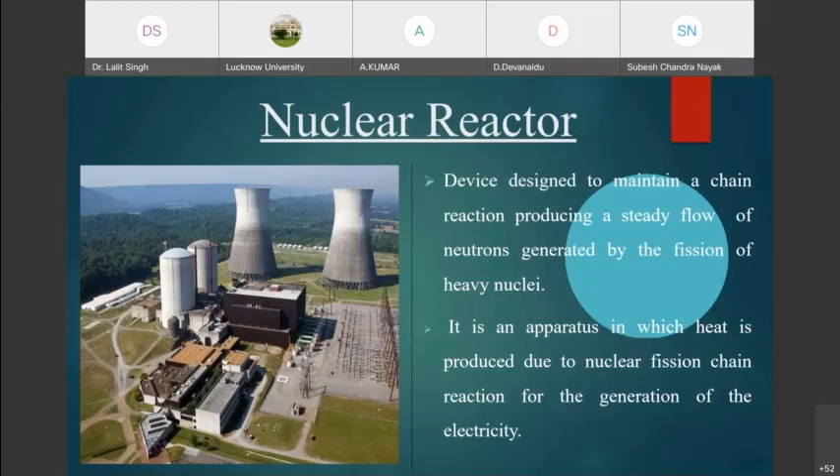Now let us see the various components of the nuclear reactor. I will be only touching upon the main components, although it consists of thousands and lakhs of components. I will not be touching on them, but from the functional point of view, as I said, the device is used to sustain the chain reaction. So for that particular activity, what are the various components that are required to achieve the overall functionality of the nuclear reactor? And then we will also see in this slide the working mechanism of the nuclear reactor.

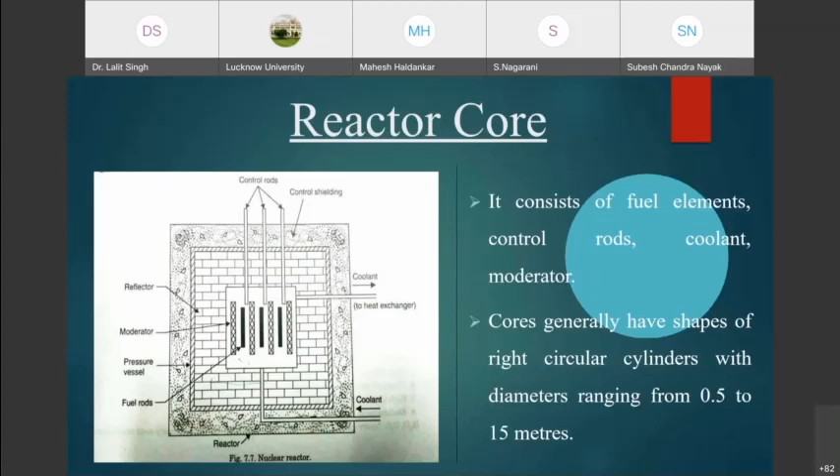So yeah, the reactor core consists of the fuel elements, the control rods, the coolant and moderator. And cores generally have the shapes of right circular cylinders with a diameter that ranges from 0.5 meters to 15 meters. And this geometry plays an important role for the efficiency of the reactor. So a lot of research scope is there to optimize the length and geometry of these cores, for which various mathematical models and a lot of physics analysis is taking place.

Coming to the reflector, as I have already discussed, whatever neutrons are trying to escape from the reactor core boundary, the reflector is imposed into the pressure vessel in the form of a coating, so that whenever any neutron tries to escape from this boundary, it can reflect back. Okay, so that we can control the population of the neutrons, because the neutrons are precious, and these are the ultimate source of energy. So it is placed around the core to reflect back some of the neutrons that leak from the core surface.

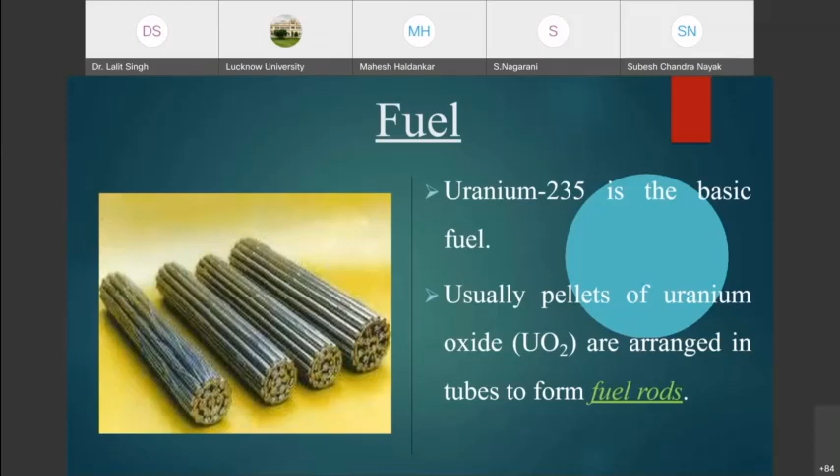Now the control rods. So we have seen the roles and responsibilities of the control rods, and this is basically to control the neutron population. Because we ultimately have to control the power: if there is a 220 megawatt nuclear reactor, which has a capacity of 220 megawatts, then definitely I should ensure that power does not rise up. Otherwise, because all the instrumentation and mechanical components are designed considering all the process parameters within the range suitable for 220 megawatts of energy.

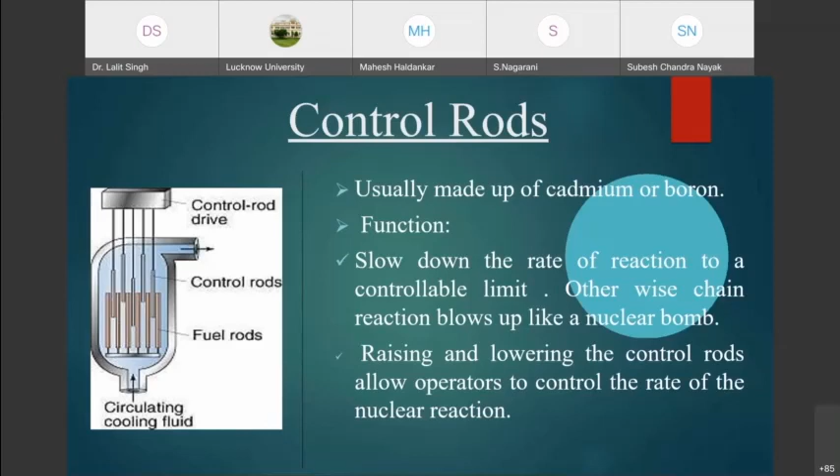Ultimately, it has to slow down the rate of the reaction to a controllable limit, otherwise the chain reaction blows up like a nuclear bomb. Raising and lowering the control rods allows operators to control the rate of a nuclear reaction. That is very important.

Now, coming to the moderator. We have touched on the moderator, and the function of the moderator is basically to slow down the neutrons, because every nuclear reaction generates 2 to 3 neutrons, which are high speed neutrons with very high energy levels. We need to thermalize, or lower down the energy levels of these neutrons.

Otherwise, they will not be able to strike the uranium nucleus, and the fission reaction will not be able to sustain. So ultimately, the role of the moderator is to maximize the probability of the neutron hitting the fuel rods.

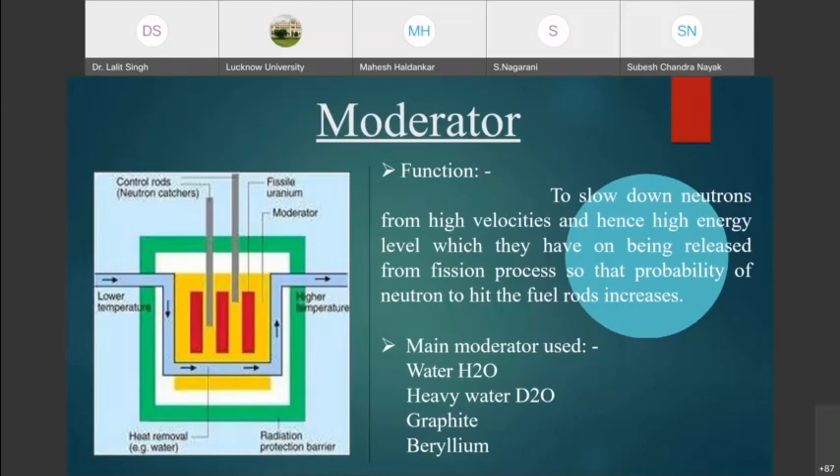But you have to wisely select this moderator, because you might have heard of the Chernobyl accident, where a graphite based moderator was used. The main reason was administrative, but the technological reason was related to the graphite. So you have to really wisely choose the moderator depending on the type of reactor that you are going to operate.

And the coolant. The coolant is basically used to remove the intense heat that is produced in the reactor, and that heat can be transferred to the water in a separate vessel. This water gets converted into steam, which is nothing but a steam generator, and that steam is used to run the turbine.

So there is a lot of research scope where you can perform the calculations and innovate new coolants that can be the best fit for a particular kind of reactor.

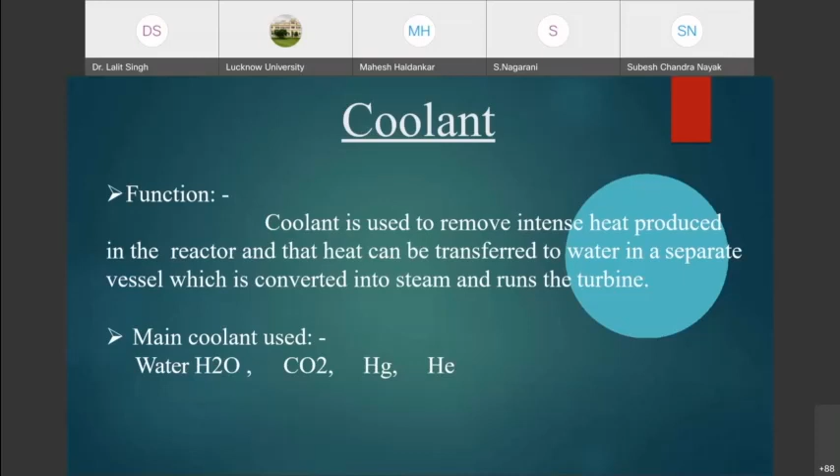Now coming to the containment. As we have seen, the containment consists mainly of three components: the reactor vessel, the pump, and the steam generator. This containment is nothing but a structure around the reactor.

Because this reactor is in a highly radioactive zone, we have to always ensure that the radioactive components do not go out of the containment zone, otherwise they can be exposed to the normal public. So it is a structure around the reactor and the associated steam generator, designed to protect it from outside intrusion and to protect those outside from the effects of radiation in case of any serious malfunction inside.

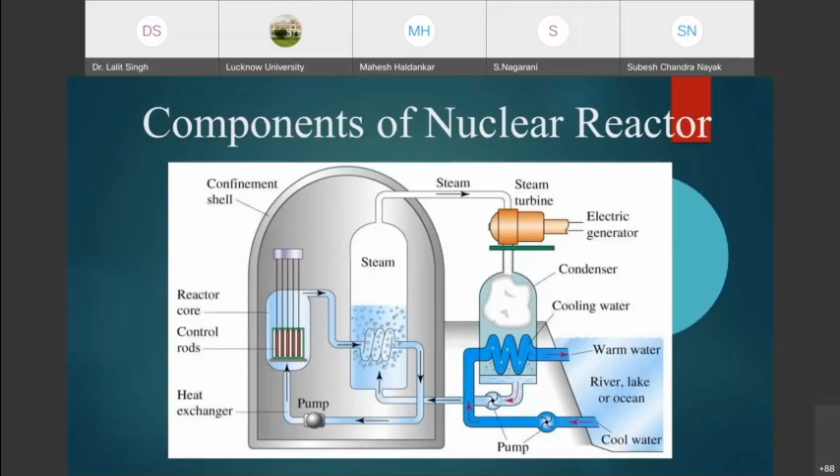So suppose, going back to the same slide, suppose there is a leak in the steam generator, for example. What will happen? The radioactive components will be out of the box and can go to the containment zone. And if there is a little leak in the confinement shell, it can go out of this confinement shell. Hence, there will be a breach of one barrier of safety.

Hence, it is very much essential to design the containment by considering all these issues, all these safety measures, and using international standards. This is the area of civil engineering. It is typically 1 meter thick concrete, made up of steel structures inside the concrete. These are the steel liners, basically.

So now let me explore more about the containment design. First of all, why do we need a steel structure inside the concrete? Because of the radiation: alpha and beta particles and gamma rays. If they try to come out from the containment, they hit the steel-like structure, which has the property to reflect them back.

Moreover, inside the containment, we have to maintain negative pressure. Why negative pressure? What is the benefit of maintaining negative pressure inside the containment? It ensures that if there is a leak, anything can come from outside to inside the containment, but nothing should go from inside to outside, ensuring the radioactivity is confined within the structure.

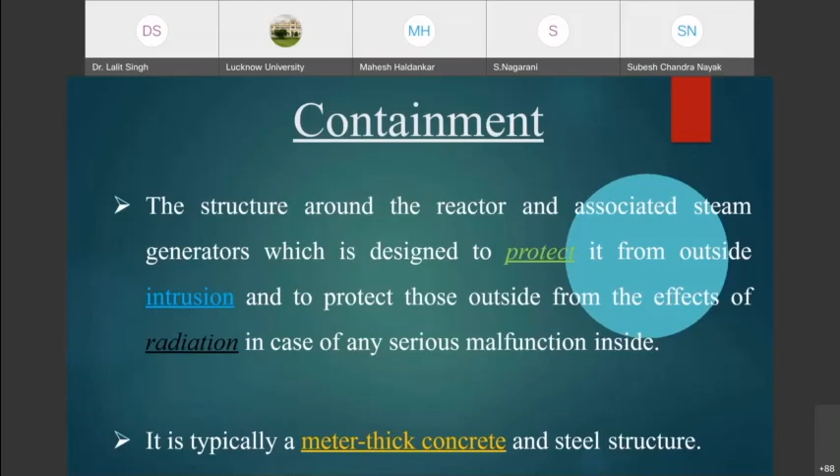Now if you look at nuclear power plants in India, India is planning a huge increase in nuclear power. It is one of its key policy initiatives, with plans to build 48 new reactors and boost the output to 63,000 megawatts by 2032, which is almost 14-fold the current levels. The country's existing 20 nuclear reactors generate about 4,700 megawatts.

I request all of you to mute yourselves because I think I'm getting noise. So the people who are interested, at least they can listen.

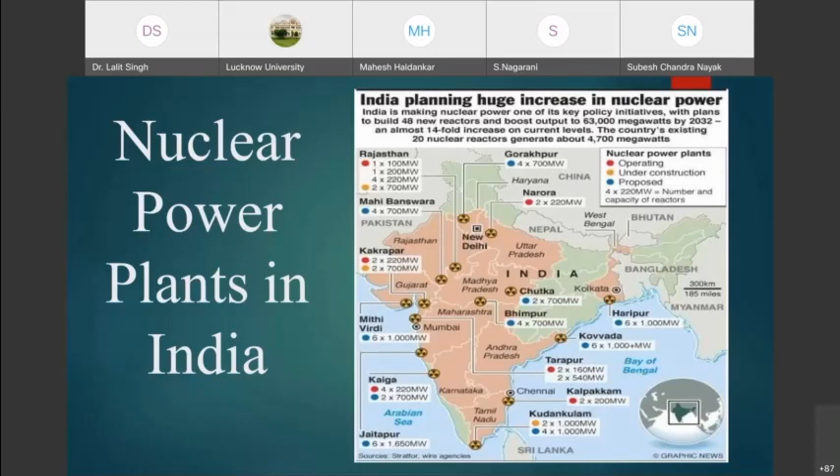Similarly, you can see the statistics of operating, under construction and proposed nuclear power plants through this map. Many reactors are now in the proposed condition. For example, Chutka in Madhya Pradesh, Bhimpur on the border of Madhya Pradesh, and Kovvada, where the government has already given its approval and construction is in the planning phase.

Now, let us understand the classification of nuclear reactors, because there are several types. For example, Germany makes light water reactors, but boiling water reactors, where boiling is allowed. Russia makes light water, but pressurized water reactors, where boiling is not allowed. India has pressurized heavy water reactors.

So different types of nuclear reactors are there, and depending on the expertise of its scientists, a country utilizes that expertise to construct a particular type of reactor. So we can classify nuclear reactors based on various parameters. These are the various parameters.

For example, on the basis of neutron energy, I can classify the reactors, because we have seen that we thermalized the neutron energy using the moderator. But some nuclear reactors make use of fast neutrons. For example, the fast breeder reactor under construction near Chennai. That is the world's first such fast breeder reactor under construction in India, which makes use of fast neutrons. It doesn't need any thermalization.

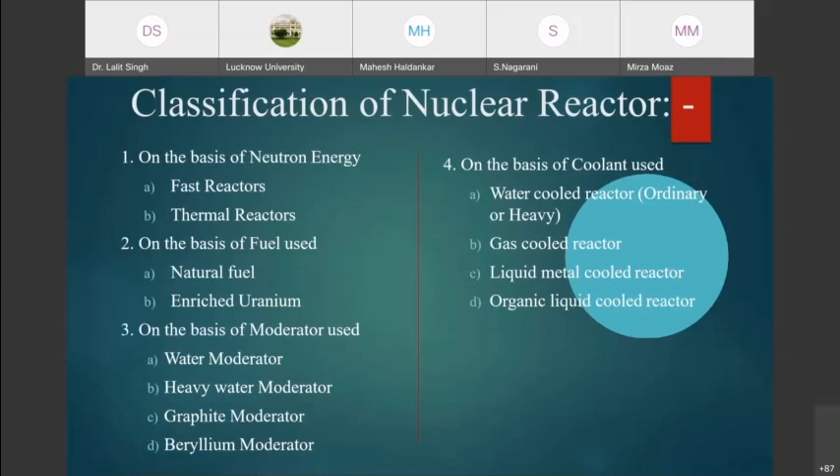I think I'm getting the echo of my voice. So I request all of you to mute yourselves. So we have muted all the participants. You can go on with your lecture. Thank you. Okay, I think your voice is also getting echo. Should I? No. I just switched it on to tell you that I'm unmuting myself. Okay. Yeah.

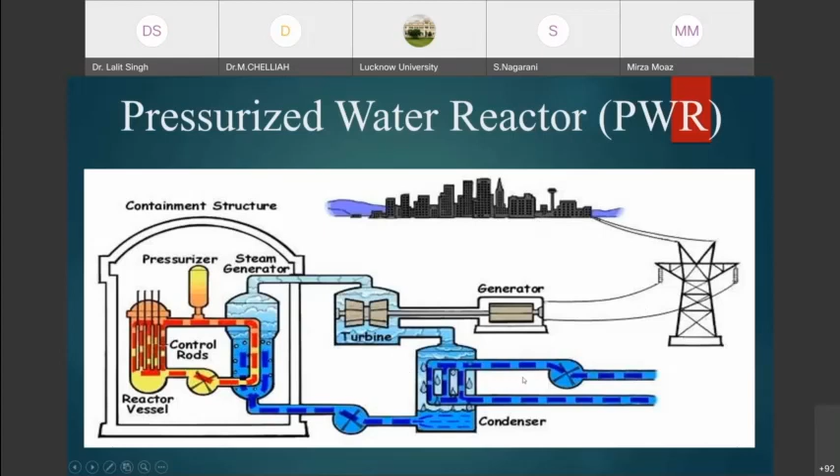steam. And that steam goes to drive the turbine, which is coupled to the generator, connected to the grid, and that reaches the consumers. The rest of the working is entirely the same, so we don't need to discuss it.

So here we are allowing boiling, so it is known as a boiling water reactor. In this type of reactor, the reactor core is not maintained under pressure. So here boiling is allowed, and in a similar fashion the steam goes to rotate the turbine, and then it is coupled to the generator.

So you can see the rest of the things are the same, but let us try to look from this difference: what are the technological challenges and what are the advantages, why such a type of reactor exists, and what are the technological challenges or technological differences between these two types of reactors.

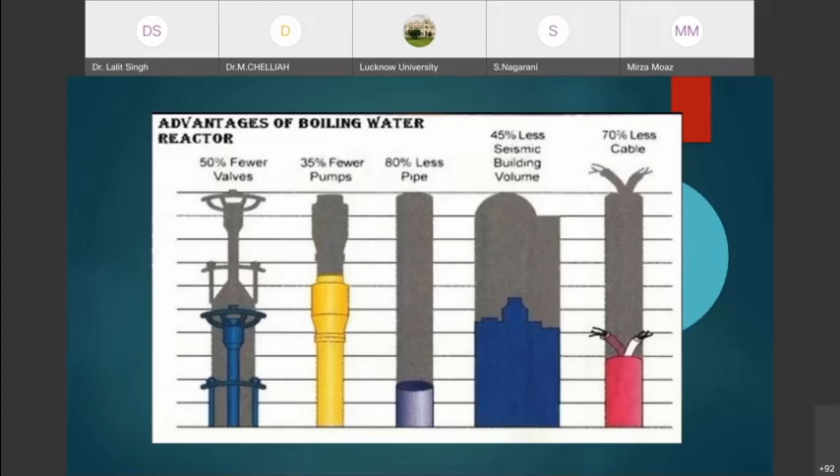And hence it's a substantial reduction. Almost 50% fewer valves are required, 35% fewer pumps, 80% less pipes, 45% less seismic building volume, and 70% less cables are required.

But we have to see the disadvantages also. If you see the disadvantages, there is a possibility of radioactive contamination in the turbine mechanism. You can go back here and see. There is radioactivity inside this pipe, because ultimately the radioactive components are in the reactor vessel, which is now directly coupled to the turbine.

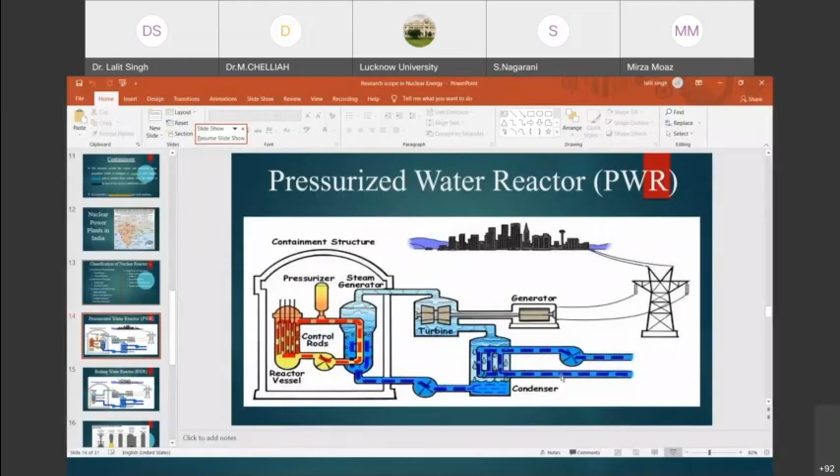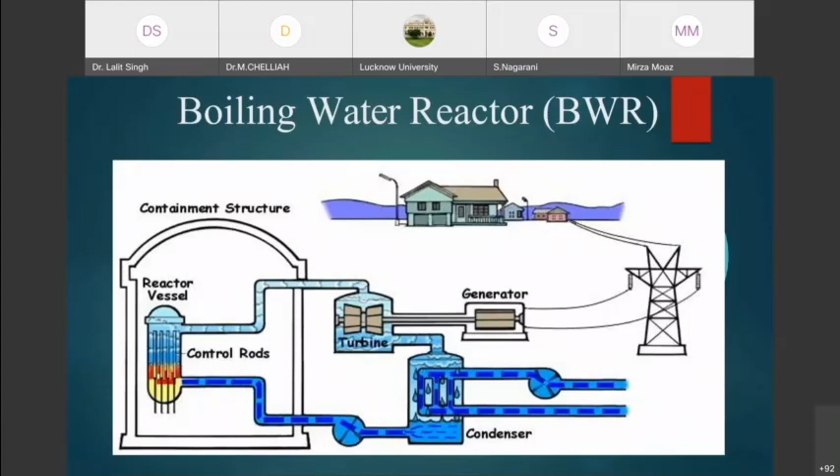Earlier it was loosely coupled because it was connected through the steam generator, but now it is directly coupled, tightly coupled. So it may be possible that this radioactivity can go into the turbine, and hence your radioactive component may have crossed the safety boundary of the containment structure, which is very dangerous. So extra safety measures you need to take.

So there is a possibility of radioactive contamination in the turbine mechanism. So we have to take additional safety precautions, which can turn out more costly, because you may have to hire safety experts, follow safety standards, and use additional safety systems, and all those will lead to more cost.

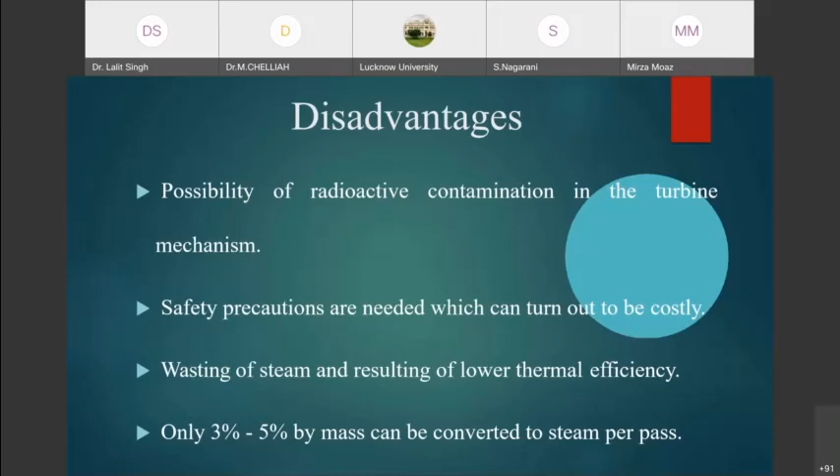In this boiling water reactor, there is a huge wasting of steam, and that results in lower thermal efficiency. Only 3% or 5% by mass can be converted into steam per pass. So these are the disadvantages.

Now this is the control room. We have touched the research scope in physics, electronics, somewhat in chemical, civil engineering, mechanical engineering, material engineering, but for computer engineering, electronics engineering and electrical engineering also, we have to see in what way these technologies are being used and what the research scope is in these technologies in the field of nuclear energy.

So this is a typical control room structure of a nuclear power plant. If you see the associated components in the control room, there are electronic components that include different kinds of computers and different kinds of displays. You can see the desktop displays and wall unit displays of different sizes. Biscuit PCs are there, which have very small displays. There are various electronic hand switches, and various analog meters and digital meters.

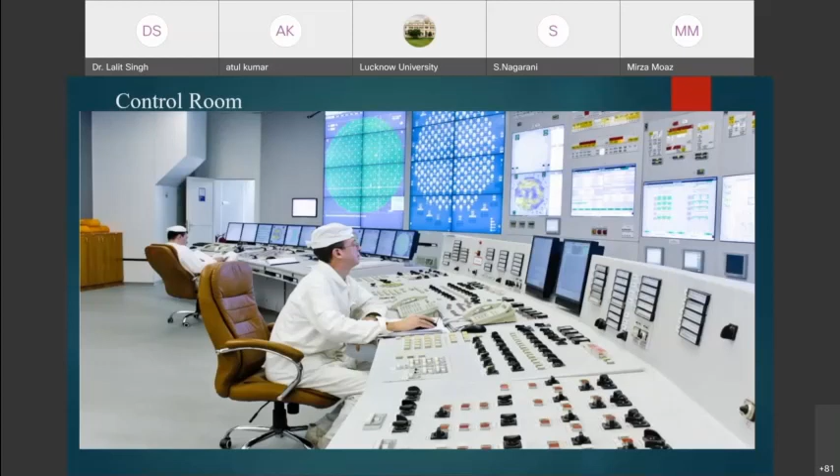And so this is the close pictorial view of this control room, where you can see there are the alarm windows on the top side, which basically blink in case any unwanted signal comes. And these are the biscuit PCs, small PCs.

So the systems which are not very important, but where information is definitely required, not very frequently, but probably daily, where it is essential to monitor such information, that kind of stuff can be put in the biscuit PCs.

And these are the big displays, and industrial PCs are basically being used because their robustness is very high, and they can sustain varying operating conditions, high temperature, low temperature, continuous 24-hour operation and so on.

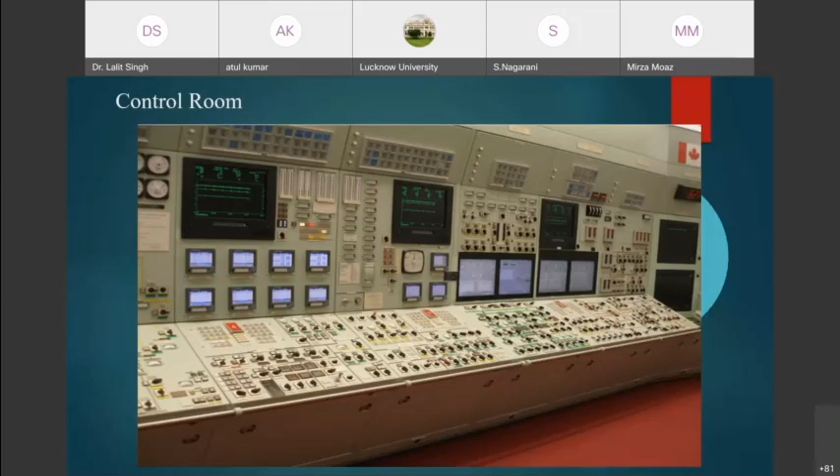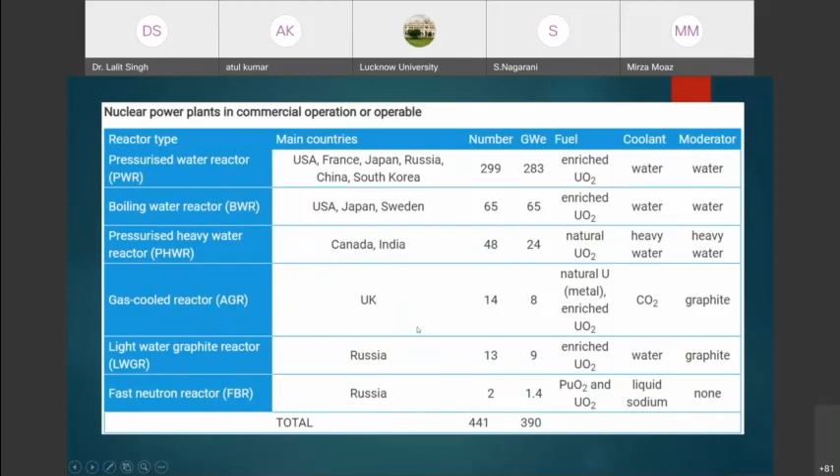So the types of reactor include the pressurized heavy water reactor, gas cooled reactor, light water graphite reactor, fast neutron reactor, like this. So that's all I wanted to share. And if you have any questions, I'll be happy to answer them.